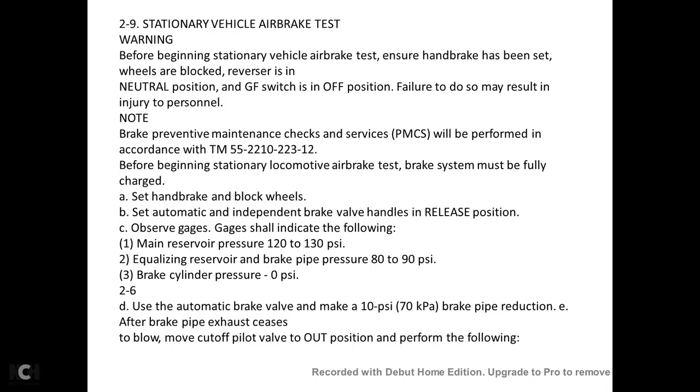C. Observe the gauges. Gauges shall indicate the following: the main reservoir pressure shall be at 120 to 130 psi. The equalizing reservoir pressure and brake pipe pressure should be at 80 to 90 psi. The brake cylinder pressure should be at 0 psi.

2.6. Use automatic brake valve and make a 10 psi brake pipe reduction. After the brake pipe exhaust ceases to blow, move the cutoff pilot valve to the out position and perform the following: make a visual inspection of each spindle in the brake cylinder.

Ensure the brakes are applied. Observe the brake pipe, brake cylinder gauge for 1 minute. Brake pipe leakage must not exceed 5 psi in 1 minute. The brake cylinder pressure should indicate between 10 to 25 psi.

Observe the equalizing reservoir gauge for 1 minute. No drop in equalizing reservoir pressure is allowed.

Press independent brake valve handle down 7 seconds. Ensure the brake releases. Move automatic brake valve cutoff valves into the in position. Make a 15 psi brake pipe reduction. Ensure the brake supply and brake cylinder pressure indicates 10 to 25 psi.

Move the automatic brake valve handle halfway to the release position. Observe equalizing pointer in the main reservoir equalizing gauge. Ensure there is no rise in pressure. Any rise in pressure shall require repair of automatic brake valve, distributing valve, and the associated piping up to the angle cock. Move the isolation switch to the run position.

8. Move the throttle to the number 3 position. Move the automatic brake valve into the emergency position. Observe the following: the brake pipe reduces rapidly.

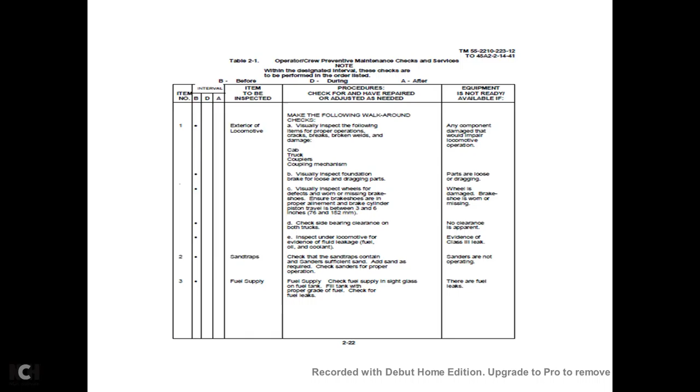Item 2: the sand traps. Check the sand traps for sufficient sand as required. Check the sanders for proper operation. The equipment is not ready if the sanders are not operating.

Item 3: the fuel supply. Check the fuel supply at the sight glass on the fuel tank. Fill the tank with the proper grade of fuel. Check for fuel leaks. Equipment is not ready if there are fuel leaks.

Item 4: the radiator. Check the coolant level at the sight glass. Ensure the proper coolant is at the proper level and check for coolant leaks and evidence of a Class 3 leak.

Item 5: the windshield wipers to be inspected. Check the windshield wipers for wear or damage and for proper operation. Equipment is not ready and available if the windshield wipers do not operate.

Item 6: the item to be inspected is the handbrake. Check the handbrake for proper operation. Equipment is not available if the handbrake does not operate properly.

Also check item: the cab windows and seats. Clean the windows with a soft cloth. Check the glass for cracks. Inspect the seat mounting for obvious damage. Equipment is not ready if the windshield is broken or cracked, or the seat mount is unsecure or damaged.

Item 8: the item to be inspected is the engine oil level. Check the oil level. Item 9: the air compressor oil level dipstick. Check the oil level.

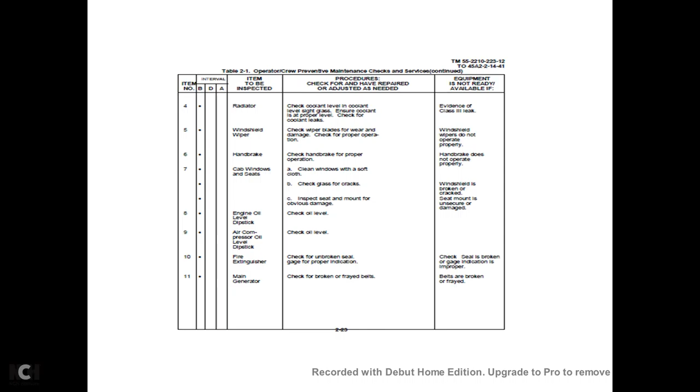Item 10: the fire extinguisher. Check the procedures for checking, whether it has been repaired or adjusted as needed. Check for unbroken seals and the gauge for proper indication. Equipment is not ready and available if the seal is broken or the gauge indication is improper.

Item to be inspected: the main generators, checking the procedure for repair or adjustment as needed. Check for broken or frayed belts. If the belts are frayed, then the equipment is not ready or available.

Item 12: the air cleaner indicator. Check to see if the green scale is visible; the equipment is not ready if the red scale is visible.

Instrument gauges: start the engine and observe the instrument gauges and indicators, ensuring the indications during operation equal the numbers indicated below. Engine oil pressure should be gauged from 50 to 70 psi. The equipment is not ready if one or more instruments is inoperative or giving faulty indications.

Engine oil pressure is 50 to 70 psi. Engine coolant temperature is 100 to 198 degrees Fahrenheit. Fuel pressure gauge is 50 to 70 psi. Air compressor oil pressure gauge is 30 to 40 psi.

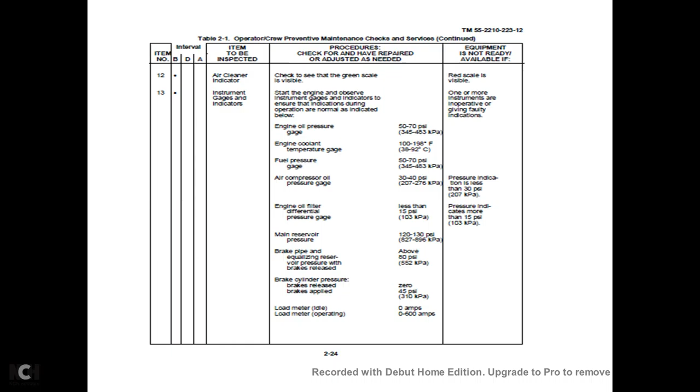The pressure indication should not be less than 30 psi, otherwise the equipment is not ready. The engine oil filter differential pressure gauge should be less than 15 psi; the equipment is not ready and available if the pressure indicates more than 15 psi.

Main reservoir pressure is 120 to 130 psi. Brake pipe equalizing reservoir pressure, with the brake released, is above 80 psi. Brake cylinder pressure with the brake released or applied ranges from 0 to 45 psi. The load meter should read 0 amps, with the load meter operating range from 0 to 600 amps.

Item 13 continued: battery charging should be in the green area indicator. Hot engine indicator light is off. Low engine oil pressure indicator light is off. Fuel pump indicator light is off. Slip indicator light is off. PCS indicator light is off. Ground indicator light is off.

Item 14: the item to be inspected in sequential order is signal devices, checking the bell and horn for proper operation. The equipment is not ready available if the warning device is inoperative.

Item 15: the brake system item to be inspected in sequential order. Check the brake system for proper operation. Ensure the brake cylinder piston travel is between 3 to 6 inches.

Check the trainline air hoses for cracks or deterioration. Check the glad hands and gaskets for damage. Equipment is not ready and available if the brake valves operate improperly.

Item 16: the air reservoir, drain moisture from the main reservoir by turning the drain valve knob clockwise.

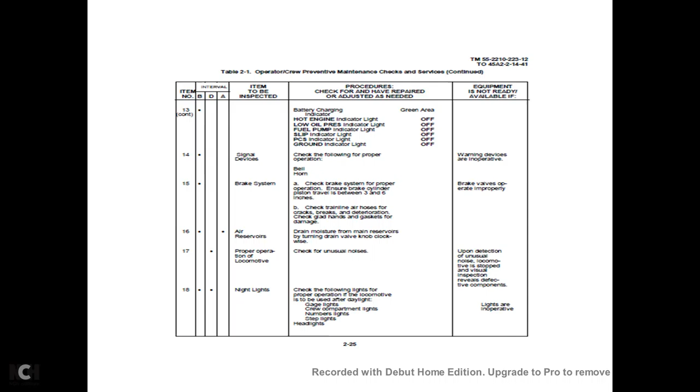17. Proper operation of locomotive procedures. Checking have been repaired and adjusted as needed. Check for unusual noises. Upon the detection of the unusual noise, locomotive is stopped and visual inspection reveals defective components.

18. Night lights. Check the following lights for the proper operation. Locomotive is to be used after daylight, gauge lights, compartment lights, number lights, step lights, and headlights. Equipment is not to be ready and available if the lights are inoperative.

To eliminate questions over the meaning of the terms used to describe the inspection tasks of the locomotive calendar day inspection, the FRA provides the following guidelines. 229.5, a break is a fracture resulting in complete separation into parts. 229.5, a crack means a fracture giving indication of weakening of the structure, exhibiting a gap of significant length in the area of potential high stress without complete separation of the parts.

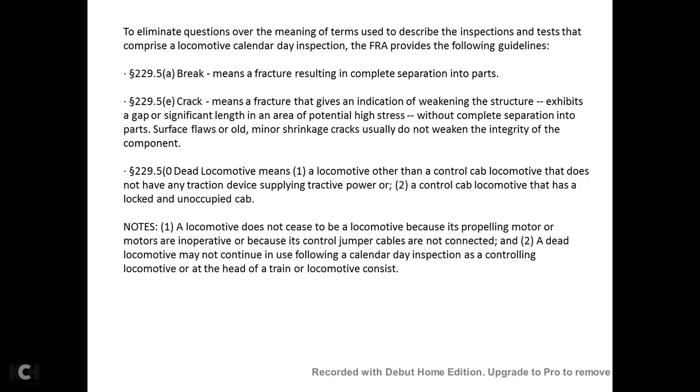Surface flaws or minor shrinkage cracks usually do not weaken the integrity of the component. 229.5, a dead locomotive is a locomotive, other than a control cab locomotive, that does not have any traction device supplying tractive power. Note the locomotive does not cease being a locomotive because its propelling motors are inoperative or its control jumper cables are disconnected. A dead locomotive may not continue in use following a calendar day inspection, controlling locomotive at the head of the train or locomotive consist.

229.7, prohibited acts. The Locomotive Inspection Act makes it unlawful for any carrier to use or permit to be used on its line any locomotive unless the entire locomotive and its appurtenances are in proper condition and safe to operate.

229.21 daily inspection. Each locomotive in use shall be inspected at least once each calendar day. Note that uncoupling the locomotive is not required when the calendar daily inspection is performed. Any condition that constitutes non-compliance with the railroad locomotive standards shall be repaired, and if used, the locomotive may be moved only as a light locomotive or dead locomotive, complying with the requirements for movement of non-compliant locomotives. Performance of the inspection prescribed does not relieve the railroad of liability under 229.7 for failure to comply with any of the provisions of Part 229.

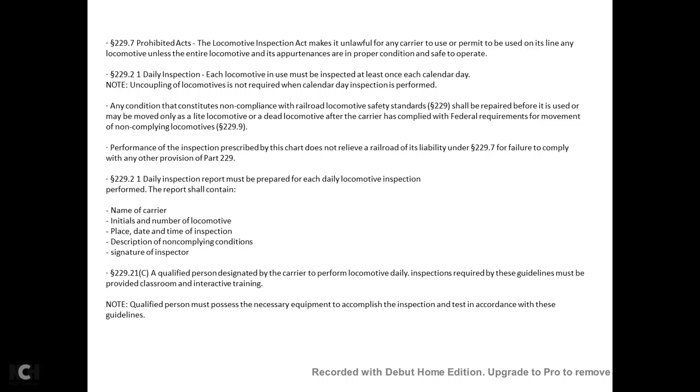229.21, a daily inspection report must be prepared for each daily locomotive inspection performed. The report shall contain the name of the carrier, initial and number of the locomotive, place, date, and time of the inspection, description of non-complying conditions, and signature of the inspector.

229.21, a qualified person designated by the carrier to perform the locomotive daily inspection required by this guidance must be provided with classroom interactive training. Note, the qualified person must possess the necessary equipment to accomplish the inspection testing in accordance with these guidelines.

Alright, moving on to the daily inspection. This is either yes or no. The top of the cab inspection, yes or no. That is 229.23, the periodic inspection. Examine the F6180.49A, the blue card, to ensure that all inspection tests prescribed by Part 229 are current.

Yes or no. Cab floors and passageways: the cab floors and passageways are free of impediments that may cause tripping or slipping hazards. The cab seat must be properly secured to prevent personnel injury.

Yes or no. Audible warning: operate the horn of the leading locomotive to determine that it functions, and when equipped, the operation of the bell. Yes or no. Cab lights: cab overhead and instrument lights shall be operative, providing sufficient illumination of pathways used by the crew, and shall be illuminated. Yes or no.

Speed indicator: inspect the speed indicator on the controlling locomotive to determine that it is not damaged. The test should be made to determine the accuracy after departure. Yes or no. Brake system: locomotive brakes shall be known to be operating as intended; the testing procedure should include testing the automatic brake and independent brake valves, and draining water and oil from the reservoir. Yes or no.

Control locomotive: whenever two or more locomotives are coupled in remote or multiple control, all systems shall respond to the control from the cab of the controlling locomotive, i.e. the propulsion, sanders, and air brakes, etc. Yes or no. Event recorders: examine the event recorder, if it is accessible to the crew members, for evidence of tampering.

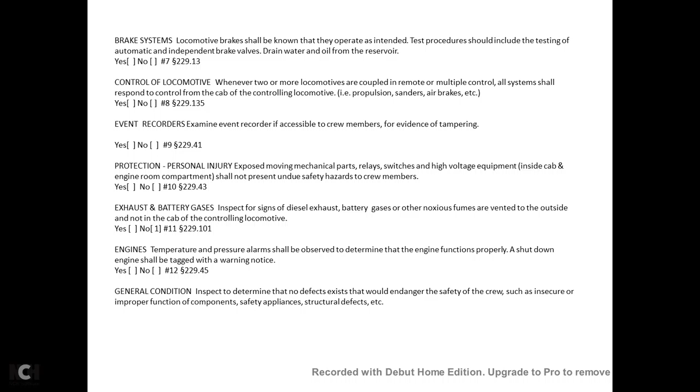Yes or no. Engines: the temperature and pressure alarms shall be observed to determine that the engine functions properly, and the shutdown of the engine shall have a warning notice. Yes or no. General condition: inspect to determine that there are no defects that would endanger the safety of the crew, such as insecure or improper functions, safety appliance compliance, structural defects, etc.

All right, daily locomotive inspection continued. The ground or bottom inspection, yes or no. Pilots with snowplows in place at the end in the direction of travel, each end of the lead locomotive, must have a pilot plate or snowplow properly secured, not less than 3 inches nor more than 6 inches above the rail. Draft system: couplers, uncoupling devices, and levers must function properly; visually inspect the exposed components of the draft system for defects, yes or no.

Jumper cables may not be broken or left hanging free on one end. A jumper receptacle may not have broken terminals or retainer caps. Sanders must be operating on each locomotive in front of the first power wheel in the direction of travel and must be in line to deposit sand on the rail. Yes or no. Headlight, auxiliary lights, and dimmer switches must operate on the lead end of the locomotive, both ends of a switching locomotive, etc. An auxiliary light may not be used in lieu of the headlight.

Yes or no. Piston travel may not exceed 1 1/2 inches less than the maximum total travel. The total possible travel can be acquired from the blue card F6180-49A. Released brakes should provide brake shoe clearance. Yes or no. All right, the foundation brake gear: inspect the brake gear to ensure that all parts are secured; brake shoes must be in line correctly with the wheel and not overlap the groove.

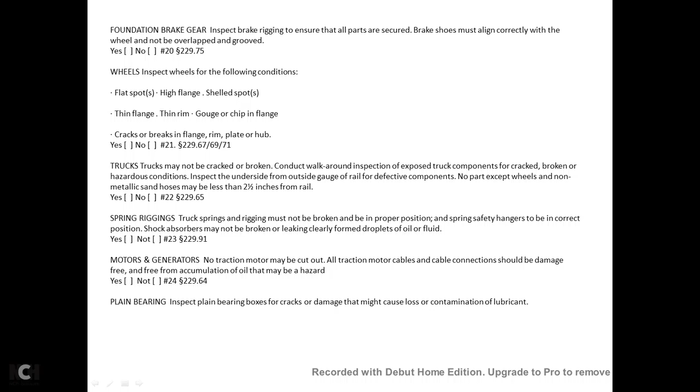Spring rigging: truck springs and riggings must not be broken and must be in proper position. Spring safety hangers must be in correct position. Shock absorbers may not be broken or leaking fluid. Motors and generators: no traction motor may be cut out, and all traction motor cable connections should be damage free and free of accumulations of oil that may be hazardous. Plain bearings: inspect the plain bearing boxes for cracks and damage that might cause loss or contamination of lubrication.

All right, your minimum set of observations, comprising the locomotive calendar day inspection. Description: minimum steps of the locomotive calendar day inspection. This section is a walkthrough of the locomotive safety standards of Title 49 CFR Part 229. The calendar day inspection and the visual walk-around inspection are a crucial component of the railroad safety program.

It provides the best and most frequent opportunity to find and correct problems of the locomotive before the problems lead to any accident or safety incidents. An effective locomotive calendar day inspection shall be based on common sense judgment as well as the guidance given with the locomotive safety standards.

The inspector should be alert to the telltale signs of any defective conditions with the potential to be a hazard. Railroads should be using the guidelines as the foundation of the calendar day inspection, tailored to the specific safety needs dictated by the railroad's type of equipment and method of operation. The definitions eliminate the question of the overall meaning of the terms that describe the inspection tests of the comprehensive locomotive calendar day inspection.

The FRA provides the following guidelines: 229.5A, break means a fracture resulting in complete separation into parts. 229.5E, crack means a fracture that is an indication of weakening of the structure and exhibits a gap of significance in an area of potential high stress without the complete separation of the parts, such as flaws or old minor shrinkage cracks, usually without weakening the integrity of the component.

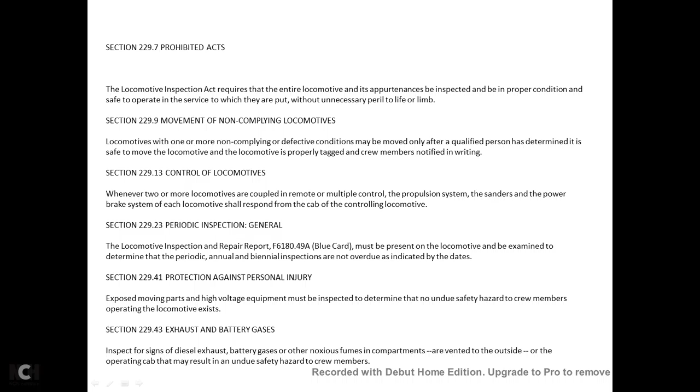Section 229.41, protection against personal injury. Exposed moving parts and high voltage equipment must be inspected to determine whether an undue safety hazard to the crew members operating the locomotives exists. Section 229.43, exhaust and battery gas. Inspect for signs of diesel exhaust, battery gas, and noxious fumes in compartments that are ventilated to the outside or the operating cab, which may result in an undue safety hazard to the crew members.

Section 229.45, any condition that would endanger the safety of the crew, locomotive, or train will be considered non-complying under this section. Safety appliances such as handrails, stairways, handholds, ladders, walkways, etc. should be inspected to determine whether or not they are loose or obstructed, and are safe in the condition intended for use. Inspecting the general condition requires the inspector to possess sufficient knowledge of the equipment to enable him or her to identify any potential unsafe conditions not specifically covered by the federal safety standards.

These conditions may include insecure attachment of components, improper functioning of components, cracks, breaks, excessive wear or other structural infirmities of components, hazardous accumulation of oil on electrical equipment, fuel, oil, and water leaks, and excessive accumulations that constitute personal injury hazards, which shall be considered a non-complying condition. The following sections have been grouped together, and the requirements outlined in these sections should be inspected as a result of the brake testing practices and procedures.

Section 229.46, brakes general. 229.47, emergency brake valve, road locomotives. 229.49, main reservoir system. 229.53, brake gauges. 229.59, locomotive brakes should be tested to determine that they operate as intended and air pressures are correct. The test procedure shall include the automatic and independent brake valves. Leakage tests are to be made to ensure the brake system integrity and that leakage does not exceed established limits. Water and oil should be drained from the main reservoir system. The emergency brake valve should be checked for accessibility and physical condition.

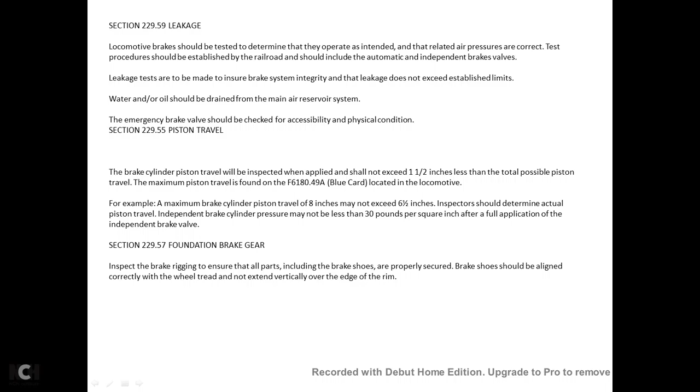Section 229.55, piston travel. The brake cylinder piston travel shall be inspected when applied and shall not exceed 1 1/2 inches less than the total possible piston travel. The maximum piston travel is found on the F6180.49A blue card located in the locomotive. For example, a maximum brake cylinder piston travel of 8 inches may not exceed 6 1/2 inches. If an inspector cannot determine the actual piston travel, the independent brake cylinder pressure may not be less than 30 pounds per square inch after a full application of the independent brake valve.

Section 229.57, foundation brake gear. Inspect the brake rigging to ensure that all parts, including the brake shoes, are properly secured. Brake shoes shall be aligned correctly with the wheel tread and not extend vertically over the edge of the rim. 229.61, draft system. The coupler and uncoupling mechanism shall be inspected to determine that they are not cracked, bent, or broken and function as intended. Couplers, carriers, and yokes must also be inspected to determine that they are not cracked or broken. Draft gears may not be broken. Visual inspection of the exposed components of the draft system is to be made for defective apparatus.

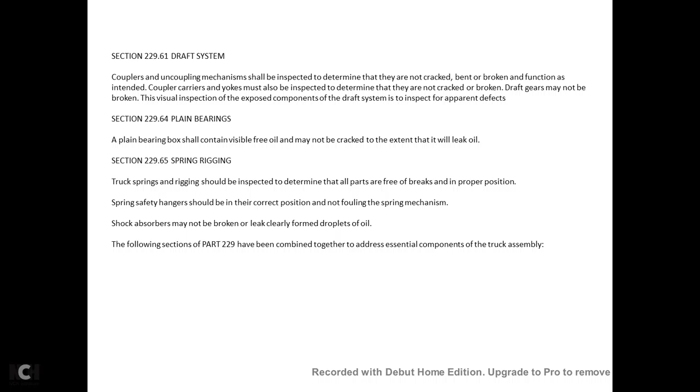Section 229.64, plain bearing boxes shall contain visible free oil and may not be cracked to the extent that they will leak oil. Section 229.65, spring rigging. Truck spring rigging shall be inspected to determine that all parts are free of breaks and in proper position. Spring safety hangers shall be in the correct position and not fouling the spring mechanism. Shock absorbers may not be broken or show clearly formed droplets of oil. The following sections of part 229 have been combined together to address the essential components of the truck assembly. Section 229.67, trucks, 229.69, side bearings, 229.71, clearance above top of rail.

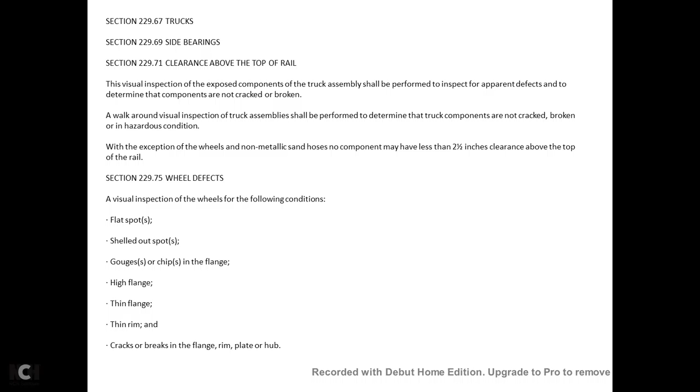The visual inspection of the components of the truck assembly shall be performed to inspect for apparent defects and to determine if the components are not cracked or broken. The walk-around visual inspection of the truck assembly shall be performed to determine that the truck components are not cracked, broken, or in a hazardous condition. With the exception of the wheels and non-metallic sand hoses, no component may have less than 2 1/2 inches of clearance above the top of the rail.

Section 229.75, wheel defects. Visual inspection of the wheels for the following conditions: flat spots, shelled out spots, gouges, chips in the flanges, high flange, thin rim, or cracks or breaks in the flange, the rim, the plate, or the hub.

229.91, motors and generators. No traction motors to be cut out, and all traction motor cable connections should be free of damage. Traction motor cables shall be free of accumulations of oil that may present a hazard. Section 229.101, temperature alarm, pressure alarm, shutter, and the controls of the internal combustion engine shall be observed to determine that the engine is operating properly.

229.117. Speed indicators. The controlling locomotive that operates with a speed range greater than 20 miles per hour must be equipped with an operable speed indicator that is clearly readable from the engineer's normal position.

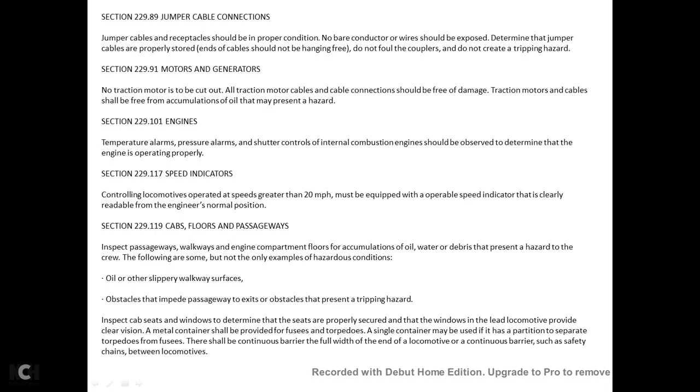Section 229.119. Cab floors and passageways. Inspection of the passageways and engine compartment floors for accumulation of oil, water, or debris that presents hazards for the crew. The following are some, but not the only, examples of hazardous conditions: oily or slippery walkway surfaces, obstacles impeding the passageway, or existing obstacles that present a tripping hazard.

Inspect the cab seats and windows to determine that the seats are properly secured and the windows of the leading locomotive provide clear vision. Metal containers shall be provided for fusees and torpedoes, and a single container may be used if it has a partition separating torpedoes from the fusees. There shall be a continuous barrier the full width of the end of the locomotive, a continuous barrier such as safety chains in between the locomotives.

229.123, pilots, snowplows, end plates. Inspect each locomotive to determine that it has a pilot, snowplow, or end plate in the direction of movement extending across both rails, properly secured, not less than 3 inches or more than 6 inches above the top of the rail. Inspect the pilots, snowplows, and end plates of the non-leading locomotives to determine that they are properly secured.

Section 229.125, headlights. 229.133, auxiliary external lights, ditch lights, crossing lights, etc. Each lead locomotive used in road service must have a headlight facing in the direction of travel, and it must be ascertained that the headlight operates properly and can be dimmed. Auxiliary external lights may not be substituted for the locomotive headlight.

Section 229.127, cab lights. Inspect the cab lights to determine that they operate and provide sufficient illumination for the controls, instruments, meters, and gauges to enable the crew to make accurate readings from their normal position in the cab. The cab passageways and compartments used by the crews shall have sufficient illumination for safe use.

Section 229.128, audible warning device. The horn of the lead locomotive is functional; when equipped, test the locomotive bell. Section 229.131, sanders. Test the sanders to determine each locomotive has sand being delivered to each rail in front of the first powered wheel set in the direction of movement. Section 229.135, event recorders. The event recorder is accessed. The crew members inspect for evidence of tampering.

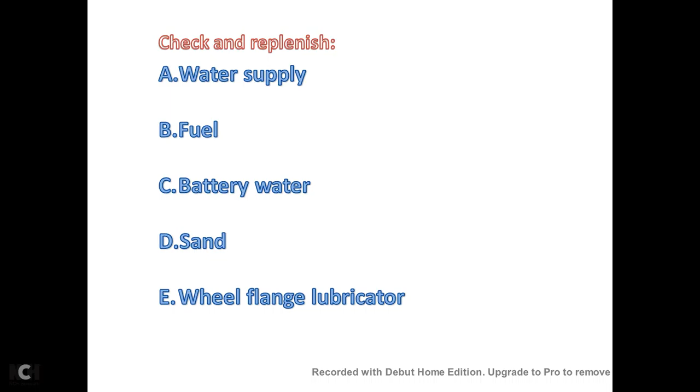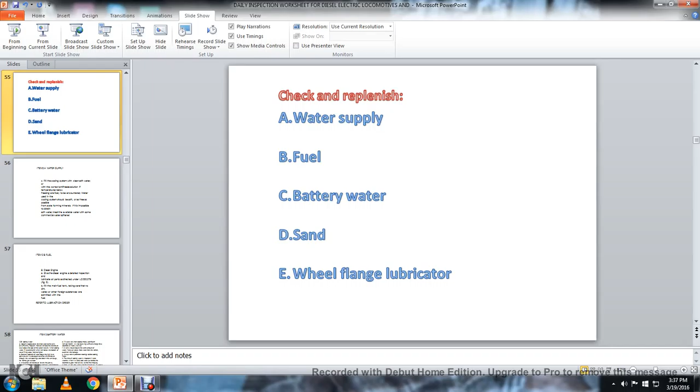Alright, we gave you the lube order. We gave you the technical manual breakdown, sequential preventive maintenance check services, and now I just read you the CFR 49 Part 229 codes. So we're gonna move on to item 2. Checking and replenishing water supply, fuel and battery water, sand, and wheel flange lubrication.

But I'm going to stop and take a break, and this next part is going to be pretty much some reading and part drawings. I'm going to go over those quickly.